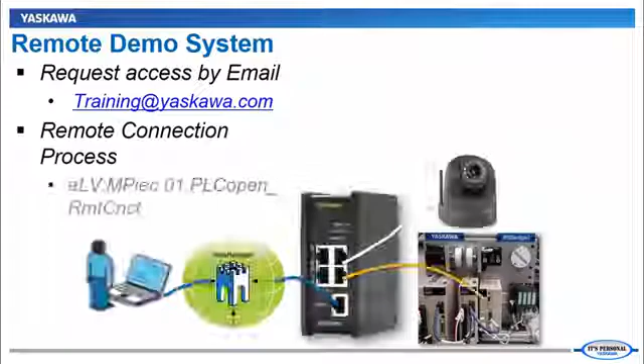To follow along in this tutorial, you'll need connection to one of our MP3300 IEC and Sigma 7 demo units. If you would like remote access to one of these demos, please request by email to training@yaskawa.com. You can see how this works in the remote connection e-learning video.

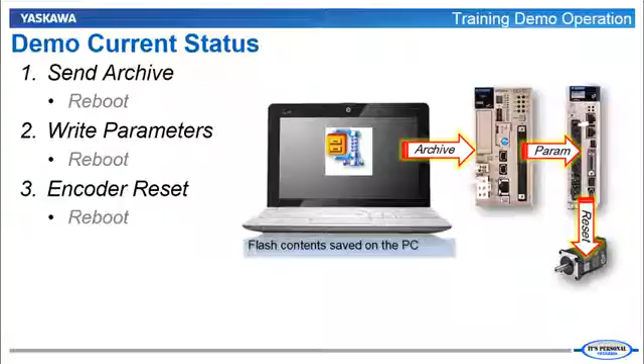In the previous video, you installed the archive to the controller, sent the parameters to the drives, and reset the absolute encoders. At this point, the remote I/O shows that there are no alarms, although there is a zero set required indication for the Z-axis, and that's because the program is detecting that the servo position has never been set. So let's move each motor to the zero position and then click Set Zero.

I'll start with the X-axis, servo on, and then enter a jog speed. 20 might be good. And then click jog. Sometimes you gotta wait to see which direction is appropriate. And I'll just jog until I see zero up here. It's pretty much arbitrary for this demo.

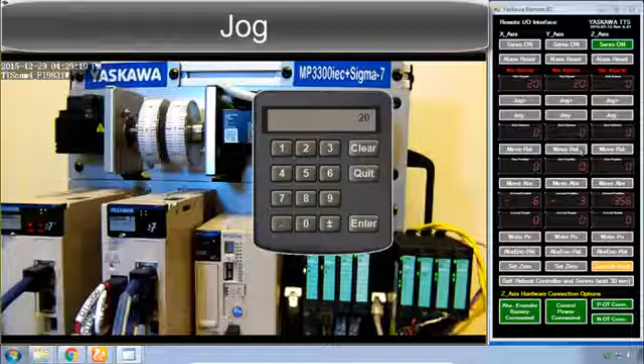And I'll go over to the Y-axis and also set the speed. Let's just do 20 again. And jog. A little more. Okay. And now we'll go to the Z-axis. I'll turn the servo on for the Z-axis. Set the speed. And jog.

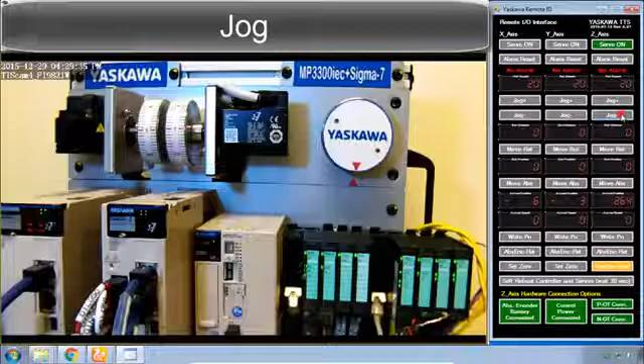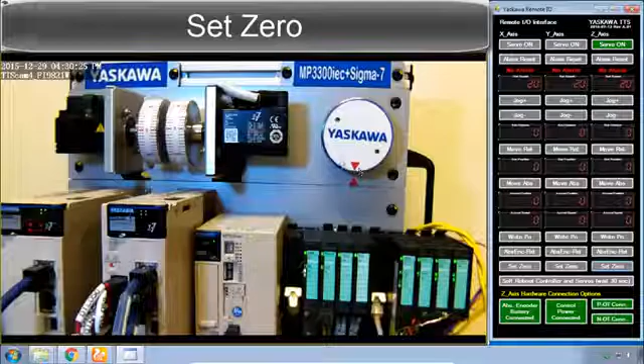That looks about right. And you can see down below the actual position feedback is not zero, but if we go through and click the Set Zero button, it sets the actual position to 0 for each of the axes. Now you might see the Z-axis kind of fluctuate between 0 and 360, and that's because 0 and 360 for this rotary axis is the same position.

Now let's do a relative move, meaning relative to the current location, and we'll set a distance of, how about 90 degrees, or 90 millimeters as the case may be. And with the servo enabled, this is on the X-axis, we'll move relative. And it moves to 90 degrees. On the Y-axis, I could move to, how about negative 180? And I'll go a little faster on this one. How about 100? And hit move relative. And it went backwards to position negative 180.

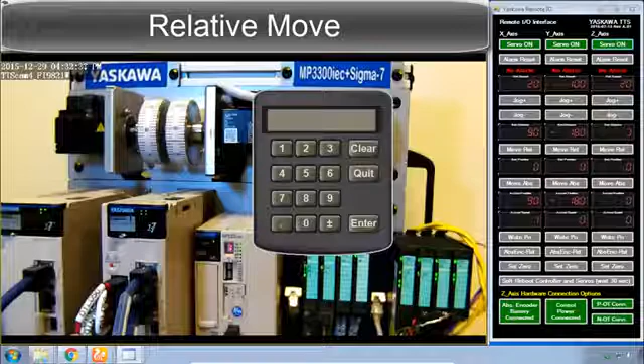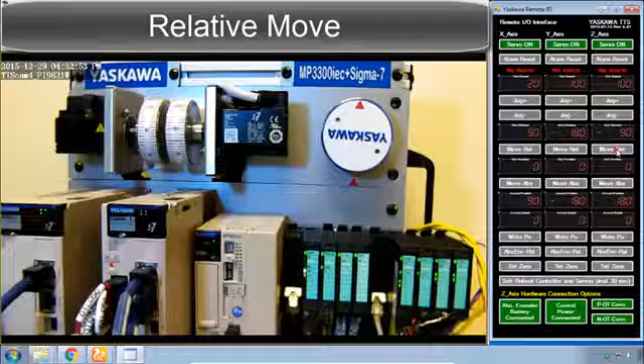And finally for the Z-axis, I'll put in a negative 90 for this one too. Negative 90. Enter. And hit move relative. Let's speed that up a little bit here. How about 100? I'll do that again here, move relative. So I can keep clicking this move relative, and it will just keep moving relative to its current position.

Now compare that to move absolute. We can put in the absolute position. Could tell it to go back to 0, which is the data that's already in here, and tell it to move to position 0. I think I'll do that for each of these axes. Have them move back to 0. Back to 0, and back to 0.

The over travel inputs, POT and NOT, are wired to the Z-axis, and disconnecting one of these inputs is indicated by P or N on the display, and it prevents the motor from moving in the indicated direction. Here I've got NOT disconnected, so I can jog positive but not negative. And the opposite is true. If I disconnect POT, leave NOT connected, I can now not jog positive and I can jog negative. And of course, if they're both disconnected, then it says P and N, and you won't be able to jog any direction.

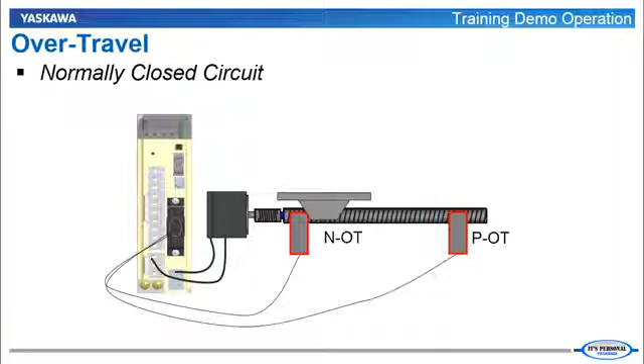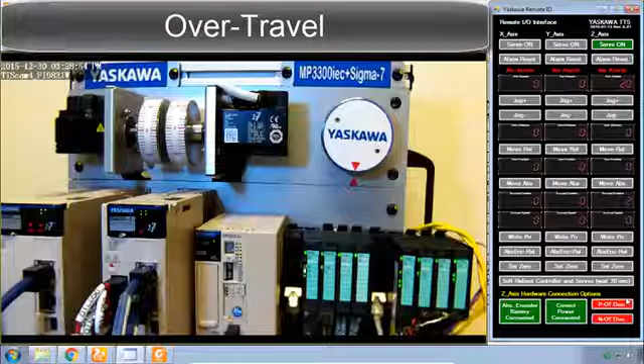These inputs are usually implemented as proximity sensors at the end of the mechanism to prevent the load from moving too far. Of course, here the load is just a wheel and it really can't move too far. So just keep both of these connected unless you want to test what happens when the motor hits one of them. And be aware of what P or N on the display of any of these amplifiers means, and realize that it's not an alarm. It's just an input that stops the motor in one direction or the other.

So this is just a real basic, fundamental type of servo operation that we have implemented here on this demo. As far as the rest of these buttons down here, you can see we have the ability to write the parameters from the archive into the servos. We have the ability to reset the absolute encoder, and we already did set 0. We also have the ability to reboot the controller and servos. These are all operations that we've done within the web UI. They can also be done here through this remote I/O HMI interface.

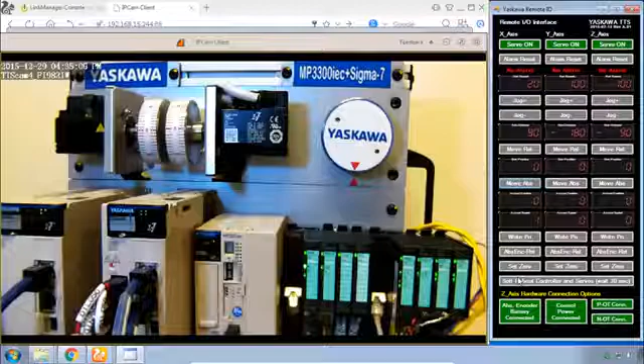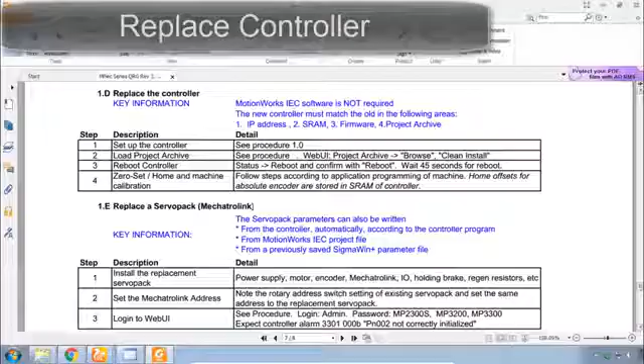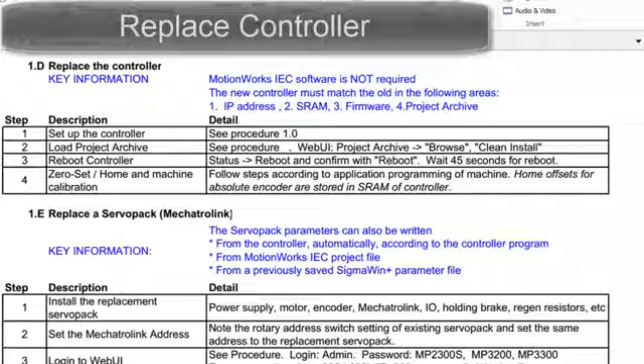So let's start with the controller. Let's turn the servos off here. So what would you have to do if the controller had to be replaced? Let's look at the quick reference guide. Section 1.D says we need to set up the controller, then load the project archive, reboot the controller, and we'll have to then zero set the machine again.

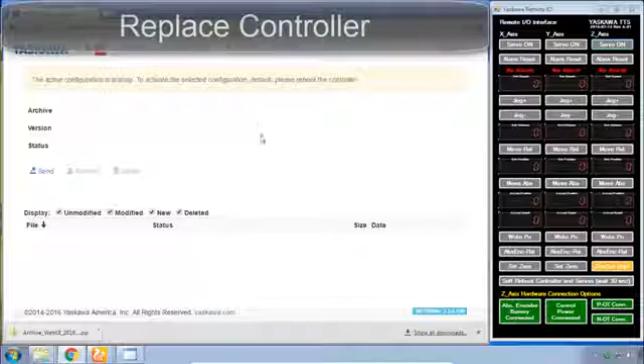Let's simulate that in the web UI by deleting the two pieces of data that the controller currently is using to run. That is, as you know, the archive. So we'll go in and delete the archive. And the other part is the SRAM. Let's initialize the SRAM. And so now this controller is at factory default, except for the Ethernet configuration.

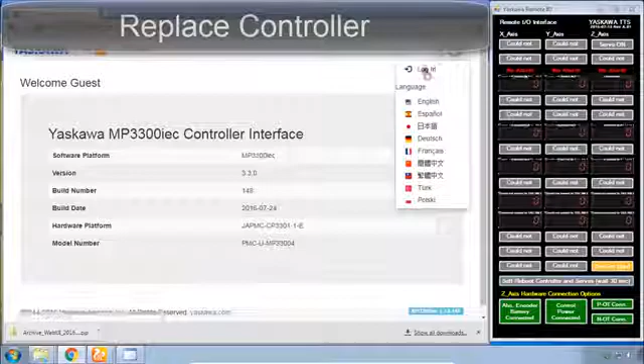So let's go ahead and reboot it. And you can reboot that here through the controller interface. It's going through the reboot cycle. And now we've got a controller that's basically got nothing on it. It's as if you pulled out an old one and put in a new one. So let's log off and log back in as if this is a brand new controller. Sign in.

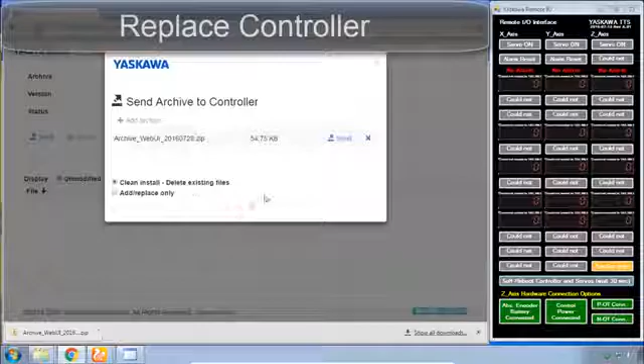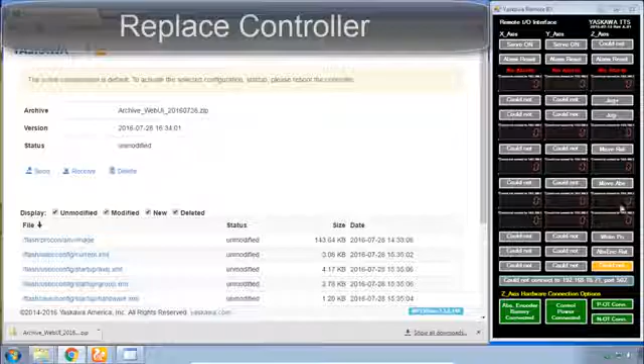And what do we need to do? Just like in the last video, we would go to the archive and send an archive. Let's add archive. We can use that same archive that we've supplied in the training. Open and send and install. Now that that's finished, you reboot the controller. You've got to keep track of what's going on here. The controller's not using this archive yet, so you're not going to be able to use the remote I/O interface yet. We will have to reboot using the web UI.

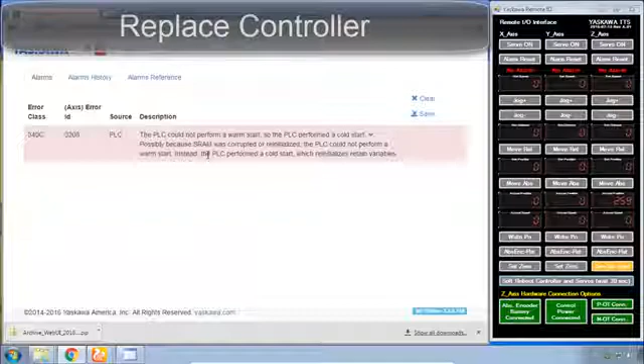Okay, here we've recovered from the second reboot. And if you take a look here, there is an alarm. Under the alarms, it says that the PLC had to perform a cold start, and that means that the retained variables were cleared out. We talk more about warm start and cold start in the IEC Basics video series. And so this is why we see that zero set is required again. Whatever variable it was that remembered if the 0 point had been set for this encoder, that variable has been reset. And the position is now invalid, so we'll do zero set required.

And we're back in action. Turn the servos back on and set your speeds again. Try 20 and jog positive, jog negative, or you can move to absolute 0.

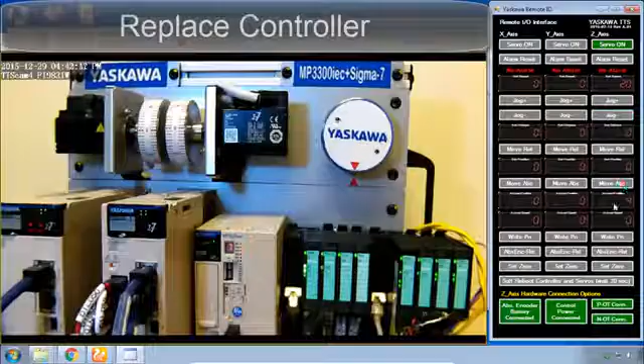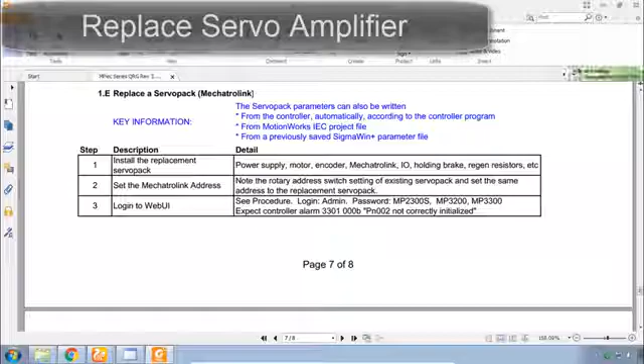Next, what about replacing one of these amplifiers? Let's say we're going to replace the Z-axis amplifier controlling this motor. The quick reference guide, section 1.E, describes how to replace that drive or servo pack. First, you install it, set the Mechatrolink address in the rotary switch, and then we can log into the web UI or use our built-in functionality in order to send drive parameters before finally rebooting the system again.

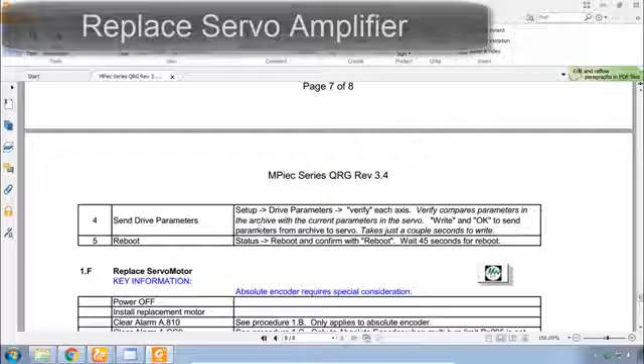If a drive is replaced, it's going to have the factory default parameter set. So let's go to the Setup menu under Drive Parameters and simulate that factory default condition on the Z-axis by writing the factory default parameters. Now this amplifier has the factory default parameter set.

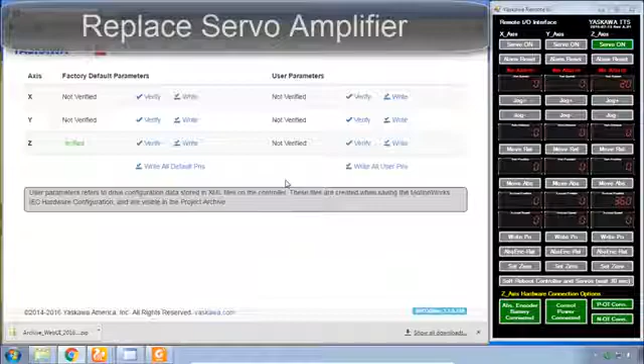Okay, now if this amplifier were replaced, of course the control power would be disconnected. And let's reconnect the control power. Now you see we have an alarm. It's an alarm because this drive does not have the correct parameters. It's been reset to factory default.

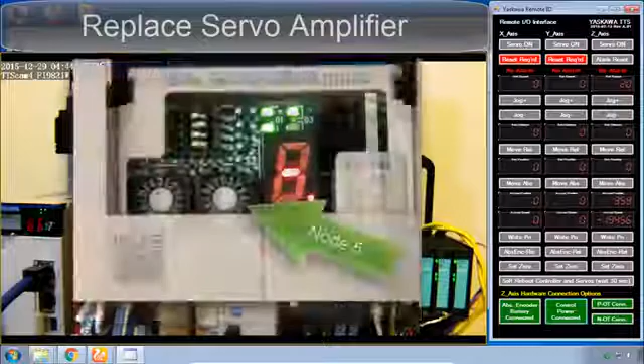As an aside, when you do replace an amplifier, you want to check the Mechatrolink node address, which is under this cover. First we'll reboot the system so that we can reconnect these drives to the controller. You can see that they're complaining about being disconnected when I turned the control power off.

So we're connected again and reading in this alarm, ACC0. You may remember ACC0 is an absolute encoder related alarm, but in this case it's because we don't have the correct parameters set in the amplifier. Let's write the parameters to that amplifier. And you guessed it, reboot again.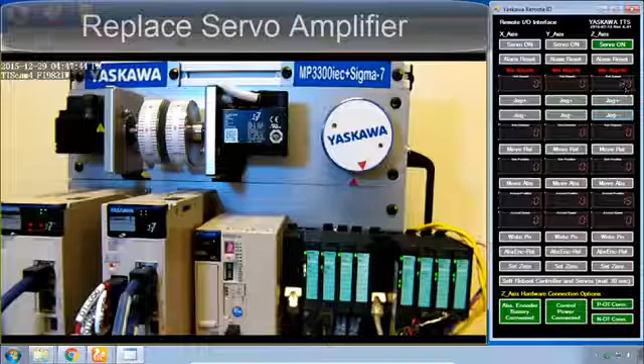And after the reboot, the alarm is gone because we have the correct parameters in the drive. Once again, we can turn on the servo and jog. Notice the jog speed is remembered because that's a retained variable in the controller. We didn't do anything to the controller this time. Move back to 0.

And now the last simulation is the motor replacement. Think about it for a minute. If you replace a motor, you've got to remove the cables from the encoder and you're putting on a new motor. So let's simulate that by turning off the power to this amplifier and then disconnecting the cable to this motor. That's the encoder cable that you see on the other motor being disconnected and connected again.

And we'll apply control power now. And you see the amplifier has this alarm, A.810. As before, when we remove power to this amplifier, that interrupts the Mechatrolink 3 network communication. And the easiest way to restore that is just to reboot the controller. So we'll reboot that controller.

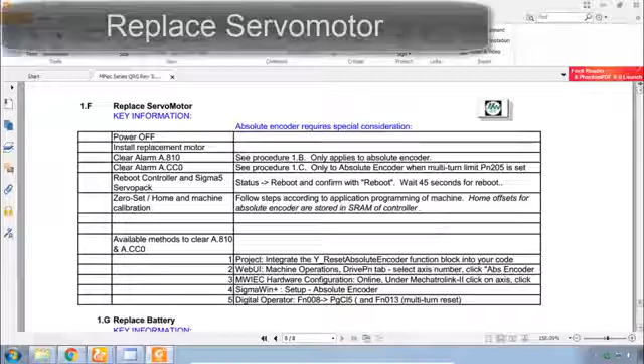And now the controller is back online with the drives, and it's reading that alarm, A.810. Quick reference guide, section 1.F, does point out that after you install the replacement motor, you'll have to clear alarm A.810 and A.CC0 before you reboot and calibrate the 0 position again. We can reset the alarm with absolute encoder reset. Reboot is required. One more time.

And this controller knows, after the reboot now, that there is no alarm, but it also knows that anytime you reset the absolute encoder, the absolute position is no longer valid and a 0 set is required. So as before, you would move the motor to the 0 point, and because it's not at 0, click 0 set required. That's how you go through and replace the motor.

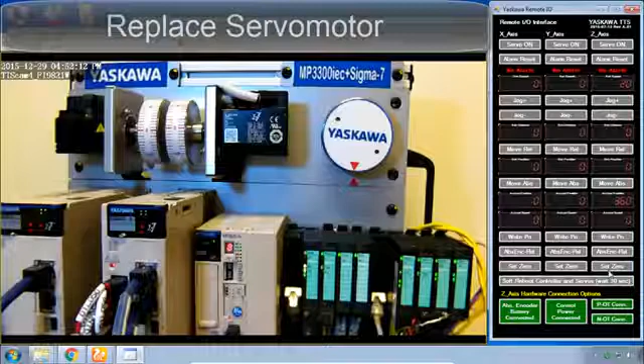You can see there's a lot of controller reboots involved when you are replacing any of the components, and of course write the parameters if you ever replace the amplifier, and reset the absolute encoder if you ever replace the motor. I now invite you to play around with this demo as much as you want.

Simulate the replacement of each component and go through the recovery process using the web UI or the remote I/O until you're confident. In the certification test, we'll ask you to load an archive just like this and use the functions of this interface.

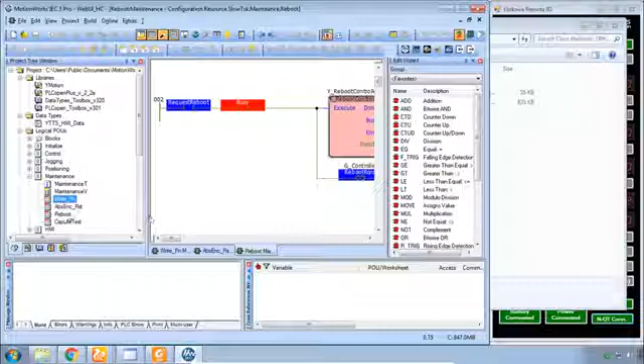Beyond the web UI, I'm guessing some of you would be curious to see the source code for this demo project. The project is included in the class materials download, and you can open it with MotionWorks IEC version 3, as I've done here. Here I have the maintenance POU with worksheets for write PN, absolute encoder reset, and reboot.

You can see them in debug mode, and it's even possible to monitor the code as it operates with the remote I/O interface. For example, I'll do an absolute encoder reset, and it turned that one red. If this is new to you, please see our self-guided training courses called IEC Basics and PLC Open Basics, which will teach you how to use this software.